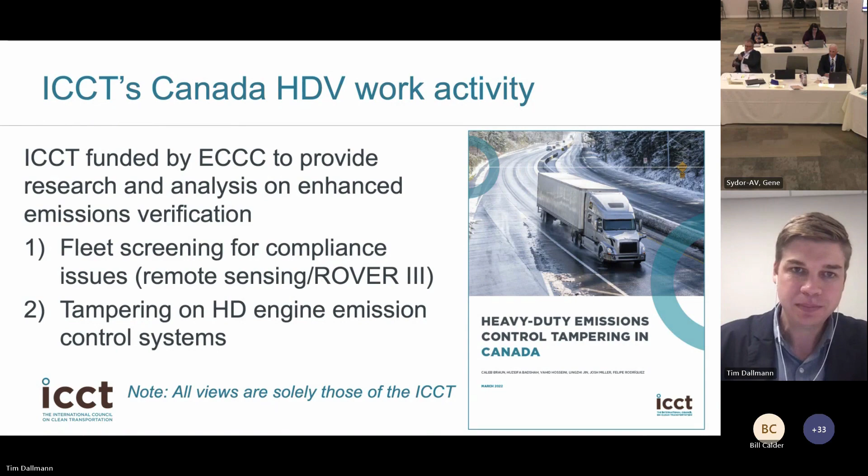So just to start off with some high-level objectives of what we're trying to do with this analysis, we really wanted to provide a holistic assessment of the issues that motivate and facilitate tampering with emission control systems of heavy-duty vehicles in Canada. And we set out to do that in a few different ways. So that included reviewing the current regulatory landscape for both provincial and federal tampering legislation.

We wanted to investigate what the technology vulnerabilities of modern heavy-duty vehicles were to tampering, and really learn more about what avenues were available for owners of vehicles who were pursuing tampering to limit the effectiveness of emission control systems. In line with that objective, we also wanted to look at those actors who are providing the devices that are used to tamper with vehicles, as well as the services to install those devices, through a market assessment, and then also learn the perspective of fleet operators.

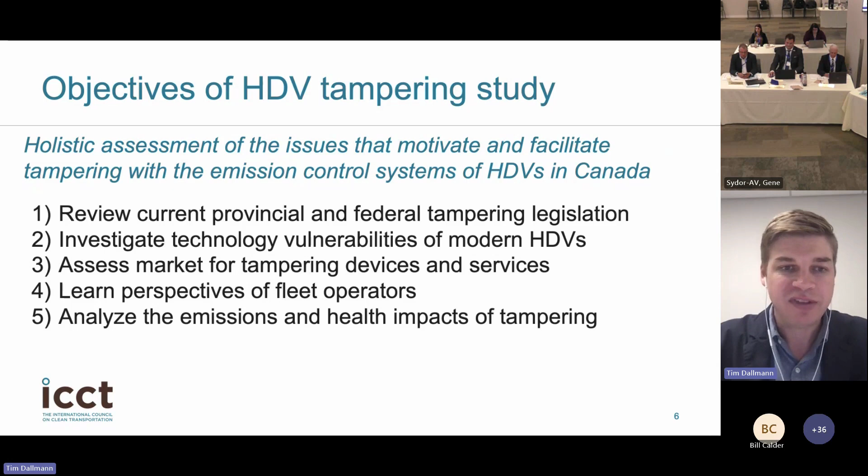So we reached out directly to fleet operators to learn more about their perspectives on tampering and the potential motivations and avenues that different stakeholders could take to try to prevent tampering. And finally, the bulk of the work that we did was to conduct a modeling study to analyze the emissions and health impacts of heavy-duty vehicle tampering, to really try to assess what the impacts would be on both air quality as well as residents' health based on the tampering study that we've been doing.

So I'm going to lead with some key findings. We'll come back to these later, but I wanted to provide them here just to frame some of the slides I'll be presenting after this. We found that anti-tampering legislation in Canada is insufficient. There are a lot of opportunities for folks to pursue tampering without fear of repercussions. Secondly, we found that tampering devices are readily available by well-established providers. So again, for those deciding to tamper with their vehicles, we found that there were a lot of avenues available for them to do that.

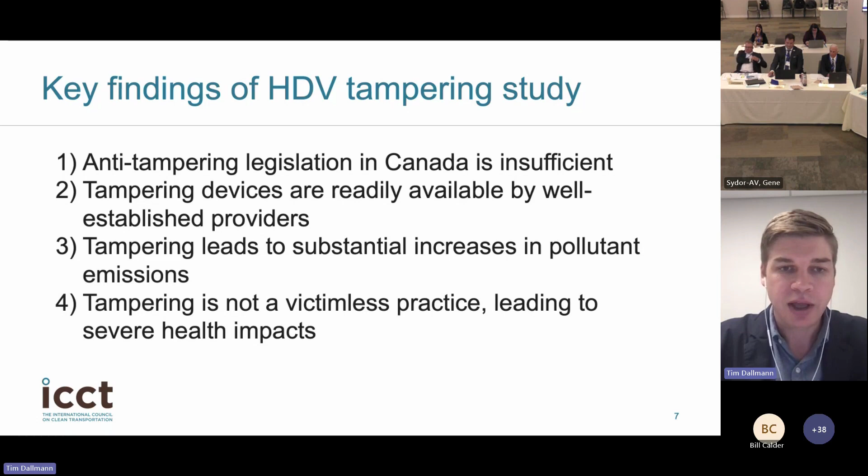Thirdly, tampering leads to a substantial increase in pollutant emissions. So the results from our modeling study really reinforced that there are significant impacts, and increased prevalence of tampering can lead to very substantial increases in harmful pollutant emissions. And finally, those emissions lead to severe health impacts. So tampering is not a victimless practice. There are real-world outcomes and negative impacts on people's health.

So just to get started, I wanted to start out with an overview of the architecture of modern diesel engine emission control technologies, how these technologies work to greatly limit pollutant emissions, and how, if they're not working effectively, the emissions can increase greatly. On the right side, the plot shows the progression of federal emission standards in the United States, which are followed by Canada, for heavy-duty vehicle engines over time. The x-axis shows the emission limit for nitrogen oxide pollution, or NOx pollution, and the y-axis shows the emission limit for particulate matter emissions.

So we can see going from 1988 in the top right corner to the small box near the origin of the axis, where it's labeled 2010, there's been a great reduction in the emission limits that manufacturers of heavy-duty engines are forced to meet. So there's been over a 90% reduction in both the PM as well as the NOx limit. And the reason why regulators have been able to move forward with these more stringent standards is that there have been great increases in the capabilities of after-treatment control technologies over time that have enabled these more stringent standards.

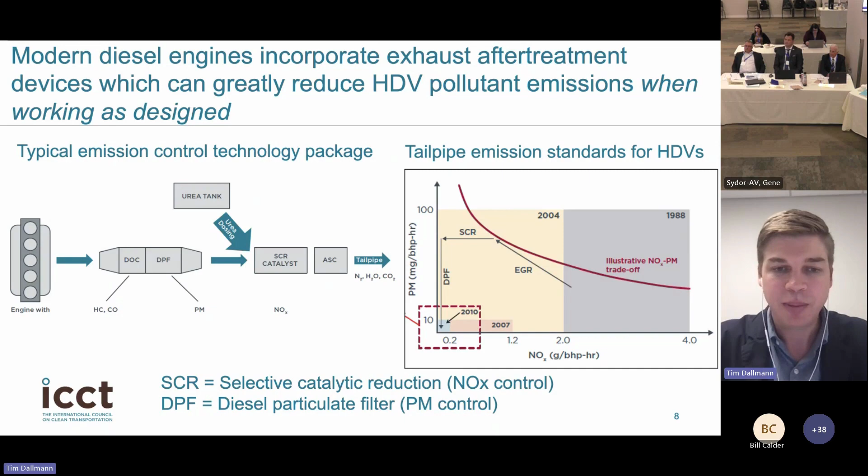So that leads us into what some of the motivations for tampering are. So if there was no benefit to vehicle owners and operators, there would be very low incidence of tampering. But there are a few areas where there's either demonstrable benefits or perceived benefits that lead to a higher motivation for tampering with these emission control systems. The first is operational cost savings.

In particular, the selective catalytic reduction system uses a working fluid called urea. So that's something that owners of vehicles and operators need to purchase and keep their tanks full. So that can lead to an annual cost savings of between $1,500 and $3,000 if that was removed from the operating cost for a vehicle.

Secondly, there's perception that removing or tampering with these emission control equipment can lead to decreased maintenance and downtime. So there are some regular maintenance intervals for the control equipment, including the particulate filters that are used to control PM pollution, as well as regular maintenance of the selective catalytic reduction system.

And finally, there's a perception that the use of these control systems leads to increased fuel consumption and, of course, higher fuel costs if that's the case. There are minor fuel economy penalties to some of the technologies that are used, including exhaust gas recirculation, which is used to control NOx pollution, as well as the particulate filter system.

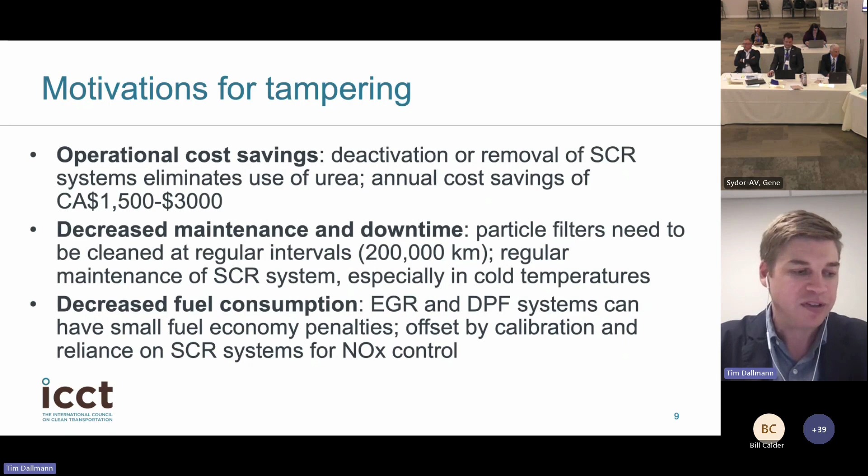However, most of these penalties have been offset by the modern ability for engine manufacturers to calibrate their engines to be very efficient and utilize SCR systems for NOx control. So in our opinion at the ICCT, the fuel consumption motivation is not in reality going to do much given the efficiency savings offered by modern diesel engines.

So I talked a lot about tampering in general. This slide gets into some of the more specific ways in which we found that modern diesel emission control systems can be tampered with that will affect their efficiency and ability to reduce pollutant emissions.

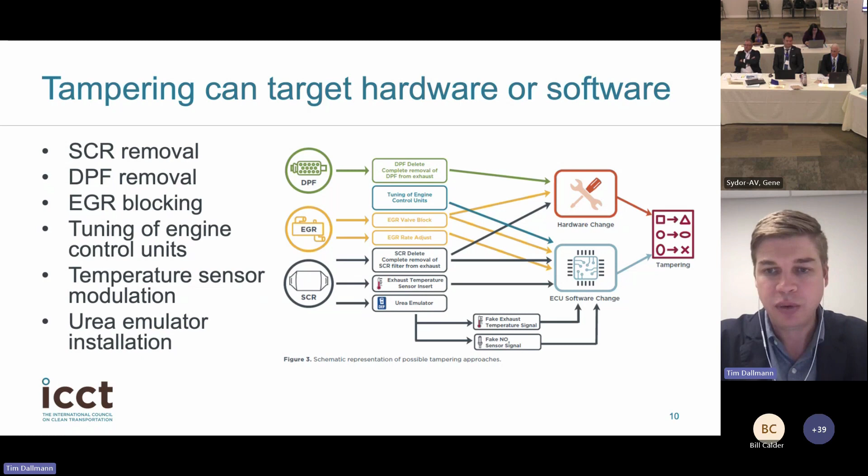So that includes anything from direct removal of the emission control equipment, so completely removing the SCR system or the DPF, all the way down to manipulation of the software that controls how these systems operate. So there's a wide variety of different avenues by which folks can tamper and affect the ability of these control systems to do their job in controlling pollution.

So that gets us into some of the aspects of the study that we did in order to provide an overview of the legislative background that's affecting heavy-duty vehicle tampering in Canada. So as part of the study, the authors reviewed the current regulations and provisions for prohibiting tampering that exist at the federal level as well as the provincial and territorial level across Canada.

And what is summarized in the report is that largely the provisions prohibiting tampering and enabling its detection are decentralized and within the jurisdiction of provinces and territories. And out of the provinces and territories that we reviewed, 5 territories and provinces, including Alberta, do not explicitly prohibit tampering of emission control systems. So there's no explicit regulatory language prohibiting owners from tampering with those emission control systems on their heavy-duty vehicles.

And we found only 3 provinces, British Columbia, Ontario, and Quebec, that have both prohibitions on the books for preventing tampering, but also have mechanisms in place by which they can enforce those provisions. So in our analysis, it's not enough to have language and regulations that prohibit tampering. There also has to be mechanisms in place for the authorities to detect when that tampering is happening and take action against those who have tampered with their emission control systems.

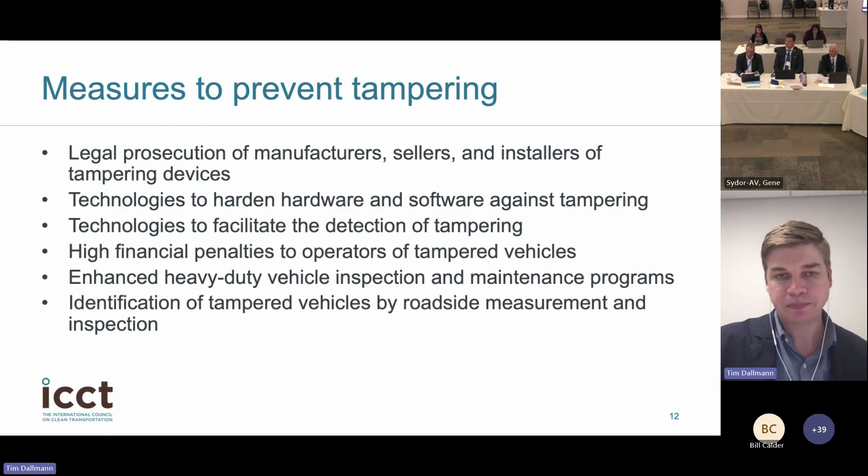So with that background, I want to transition now into the modeling work that the ICCT did in order to try to quantify the impacts of heavy-duty vehicle tampering. This slide shows the approach that we took. I'll walk quickly through each of the pieces here. So the ICCT maintains 2 models that we use and regularly update in order to model vehicle emissions inventories and the impacts of different policies on emissions, which we call the roadmap model.

And then the second piece in blue on the right, which we call the FATE model, is another component of our modeling infrastructure that's used to take the results from the roadmap model when it comes to the changes in emissions from a specific policy or scenario and translate those into changes in ambient air quality concentrations and health impacts.

So together, the roadmap and FATE models are able to look at different emission scenarios where, for example, if Canada were to implement new emission standards for heavy-duty vehicles, we could look at how that would impact total emissions over time, and consequently how that would impact air quality and ultimately human health.

So each of the other pieces in beige show some of the input data that we fed into the model. On the left, we have emission factors for various vehicle technologies, ages, and emission control levels, as well as the impact of tampering on those emission factors. We have assumptions about the incidence of tampering, so how frequent and what percentage of the fleet is assumed to be tampered with, as well as fleet inventories and fleet activity data at the provincial level.

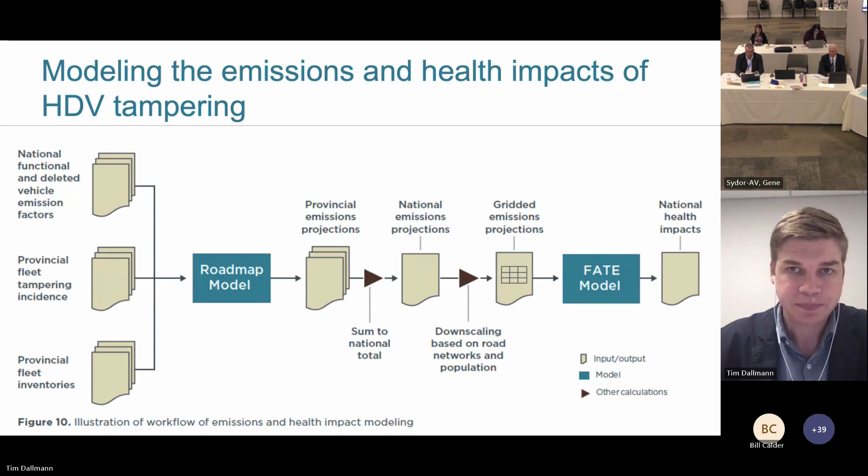So one of the key inputs to this study really is the tampering incidence. So how frequently and what percentage of the fleet can we consider to be tampered with? And this is a really hard data point to come by. There's not a lot of information out there, and that's one of the reasons why, in our opinion, the Rover 3 study has been a really valuable resource: it's actually providing some real data that can be used to inform these types of studies.

Unfortunately, the data from the Rover 3 study wasn't available to the ICCT when we did this analysis, so we had to come up with a different approach to define the prevalence of tampering in Canada and in individual provinces. And since there was really a lack of data at the time we were doing this work, we looked at a couple different scenarios to provide a range of what the impacts might be under different levels of tampering.

So this slide shows the 4 different scenarios that we modeled in our work. We started with the counterfactual, which was a case where we assumed that there was no tampering. In that case, we assumed that all of the trucks on the road were meeting emission standards and that the emission control equipment was operating as expected and as intended. So you can see that the incidence of tampering in Alberta and nationwide is assumed to be 0%.

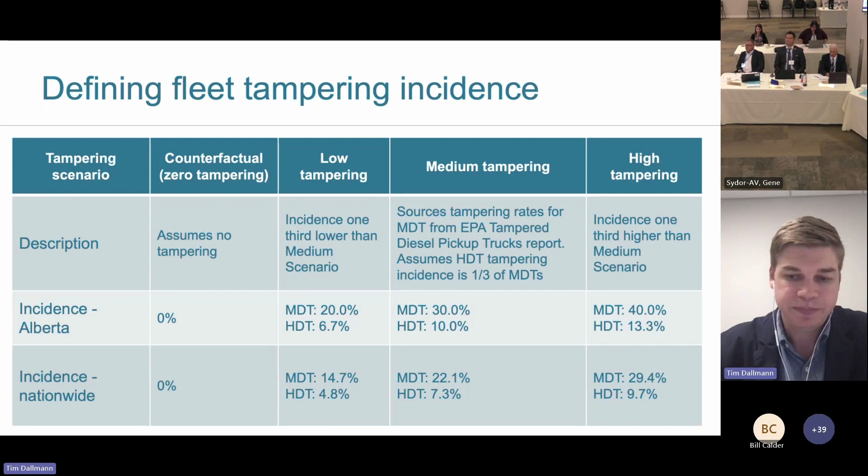So this slide is quite detailed, so I'll just try to point out a few of the key features rather than explain the whole thing. Essentially, this shows our estimates of excess emissions from tampering in 2 years, 2010 and 2019. We're showing results for NOx in the left-hand plot and PM in the right-hand plot, for each year at the provincial level.

So one feature I really want to point out is that in all cases, emissions decreased from 2010 to 2019. And that's really showcasing the effectiveness of the modern diesel control system. New vehicles sold into the market in 2010 were required to have both diesel particulate filters and SCR systems, and the combination is really effective at reducing emissions. So you can see, absent any tampering, the implementation of those new technology packages really reduces emissions of both NOx and PM.

But the other thing to point out is in blue. If we just focus on the far left-hand plot, the blue is showing the excess emissions from tampering for each province in 2019. As the entire fleet's emissions are reduced through these advanced control technologies, the importance of tampering becomes much greater, because you have 90% of the fleet that's very clean, but those tampered vehicles have much higher emissions and are driving a much larger portion of the inventory.

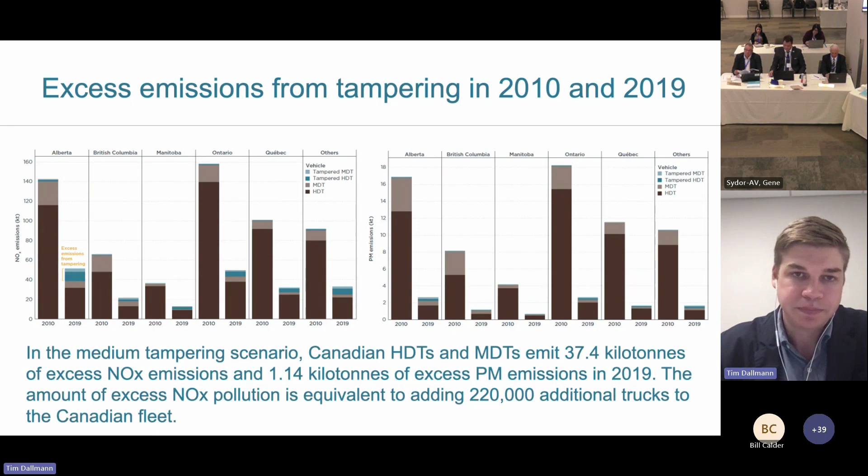So in addition to looking at past years, we also looked forward at what the impacts of tampering might be as we continue to overhaul the fleet and introduce more stringent emission standards over time. This shows projected emissions between 2020 and 2040 for NOx on the left and PM on the right for the province of Alberta for each of the different scenarios. The brown line shows the counterfactual scenario.

So again, in the case where the assumption is that there is zero tampering going on, we can see that the implementation of both the existing standards and improved standards over time greatly reduces both NOx and PM emissions to near zero levels. However, in the tampering scenarios, even the low tampering scenarios offset much of that potential emissions reduction.

So we found that in the low tampering scenarios, PM pollution could be about twice as high as the counterfactual example, and the discrepancies were even larger for NOx emissions on the left, where we saw emissions could be up to 6 to 7 times higher under the various tampering scenarios.

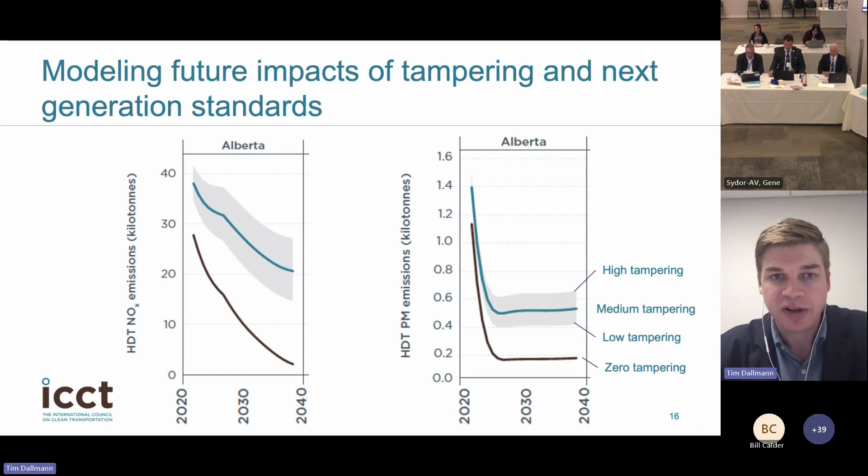And those excess emissions have impacts, not just on air quality, but also on health. So this plot shows our estimates of the differences in premature deaths in the top plot and disability-adjusted life years in the bottom plot for the different scenarios that we included in our modeling exercise.

So we can see on the top, just focusing in on the estimated premature deaths from emissions from heavy-duty vehicles in Canada, the implementation of existing and new emission standards greatly reduces the health burden of heavy-duty vehicle activity in Canada under the assumption that there's no tampering going on.

So if we look at that brown line, we see the number coming down from about 423 in 2020 to around 65 in 2040. However, again, if there's tampering happening, even in a low incidence scenario, those health impacts increase greatly. So from 65 to up to around 474 in 2040 for the medium tampering scenario.

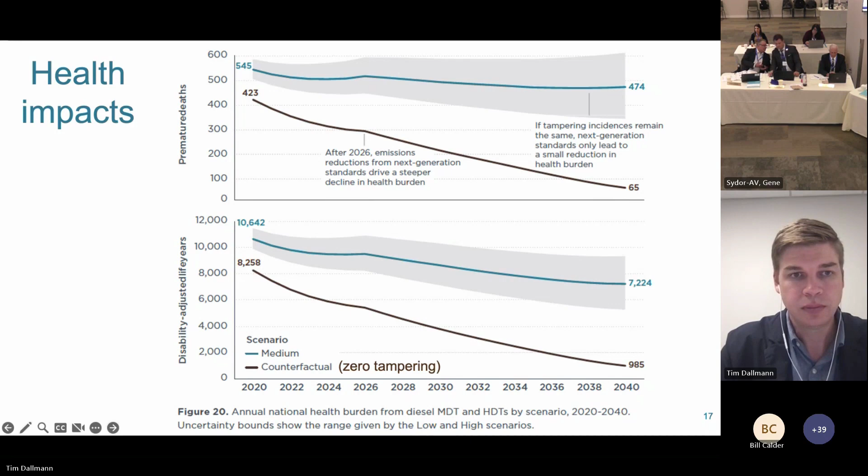And this also speaks to the need for studies like Rover 3 that are actually trying to quantify what this incidence is and to provide some real world information that can help to support better estimates of both the emissions impacts of tampering as well as the health impacts.

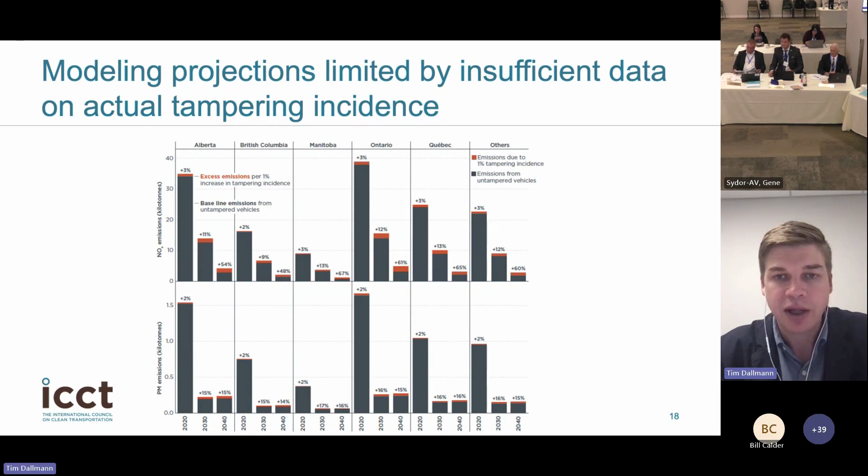So in closing, I just want to reiterate some of the key findings from the study that I presented here today. First, from our viewpoint at the ICCT, we consider anti-tampering legislation in Canada to be insufficient. Alberta, as well as many other provinces and territories, either lack statutes prohibiting tampering or have not yet adopted provisions such as inspection and maintenance programs that enable enforcement of those prohibitions.

Secondly, we found in the course of the study that tampering devices are readily available from well-established providers. In particular in North America, popular approaches include a combination of hardware removal, so actually removing pieces of the emission control system itself, or manipulation of the software that is controlling the actual operation of that control equipment.

Thirdly, from our modeling study, we were able to demonstrate that tampering leads to a substantial increase in pollutant emissions. So again, in 2040, each 1% increase in tampering is modeled in the study to result in an emissions increase of PM of 15% and NOx of 57%.

And finally, tampering is not a victimless practice. The study was able to quantify the health impacts of different tampering scenarios through 2040. And we estimated that each increase in tampering incidence of 1% leads to 690 excess premature deaths over the next 20 years.

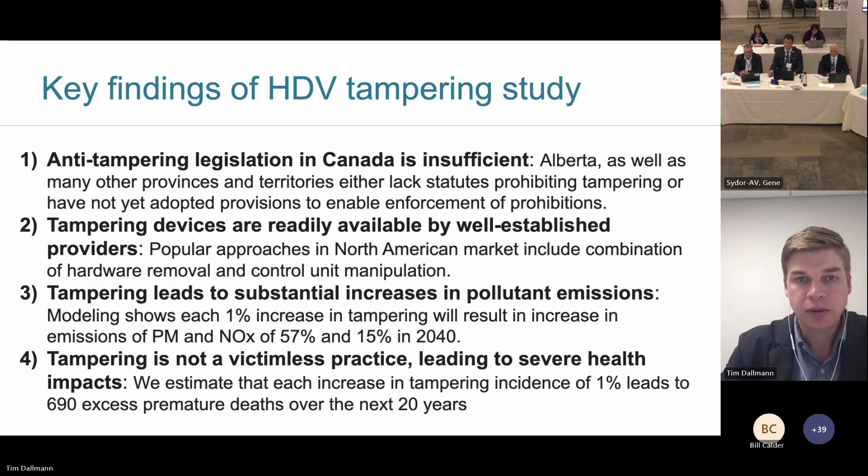In closing, I'll share here the policy recommendations that were put forth in the ICCT study, and I'll reiterate again, these are the perspective and viewpoint of the ICCT as an international independent expert organization. So the first is we recommend that Canada should explicitly prohibit tampering at the federal level. The approach now, leaving decisions to each province and territory, we found to lead to a patchwork approach that hasn't been effective in discouraging tampering.

Secondly, steep penalties should be set for the providers and users of tampering devices and services to, again, discourage that as a route to manipulating the engine and control equipment. We found that inspection and maintenance programs can be an effective way to address tampering. So requiring regular testing and inspection of vehicles, again, provides another barrier to folks who might be pursuing tampering options.

As I mentioned earlier, remote sensing and other roadside emission inspection methods can be used as a way to identify when tampering is happening outside of the normal inspection and maintenance program requirements. And the last two points here speak to future emission standards being used as a mechanism to drive the adoption of technologies that can prohibit or make it more difficult to tamper with engines and emission control equipment.

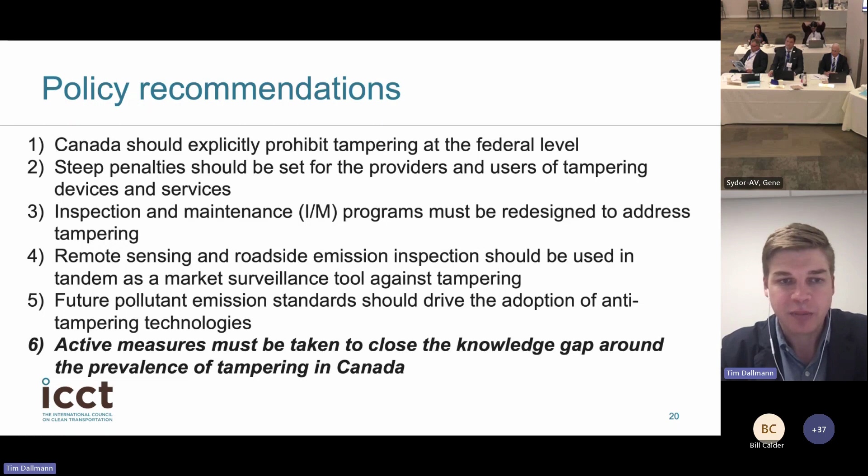And finally, I put this in bold because I think it speaks to the presentation that Niranjan will be giving. We really think that there should be more research and study of the prevalence of tampering in order to close a knowledge gap and provide the information that can support the implementation of these various policy recommendations.

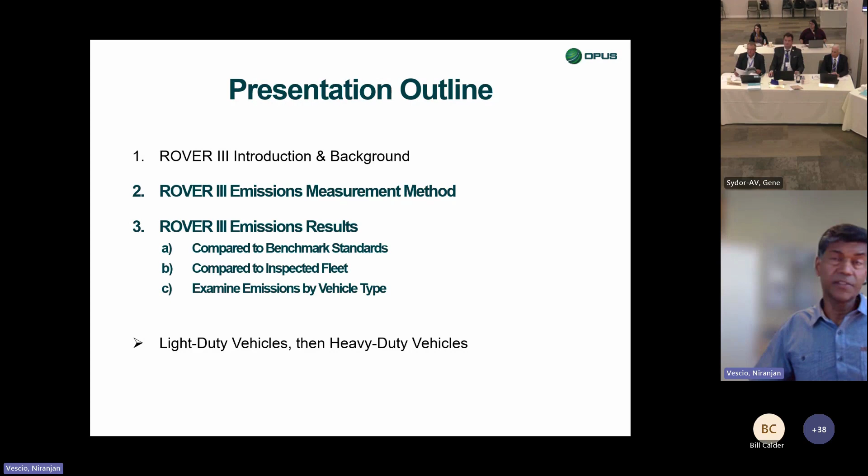Okay, I'll do light-duty vehicles first and then heavy-duty. And if necessary, I'll pause after light-duty and we can take some questions or we can just move right ahead. All right, so here's the background, and you know it just as well as I do. CASA had a non-point source report, we call it mobile sources, that was done a few years back.

Within that report were projections or estimates from an air pollutants emissions inventory, and that indicated that heavy-duty diesel vehicles and then light-duty gasoline trucks were a large source of nitrogen oxides. Those gasoline trucks were also a source of hydrocarbons, and those heavy-duty diesel vehicles were a particular source of particulate matter. Okay, and so that was the motivation for CASA contracting with us, and we did the light-duty vehicles and heavy-duty vehicles in different years.

85% of the data we collected for light-duty was in 2021. There was a little bit collected in 2020 when we came up to scope things out. And then we went back and collected about 10% of the data in Fort McMurray for the light-duty vehicles in 2022. All of it was in 2022 for heavy duties. Okay, there were previous rovers, but they were with older technology and they only focused on light duty.

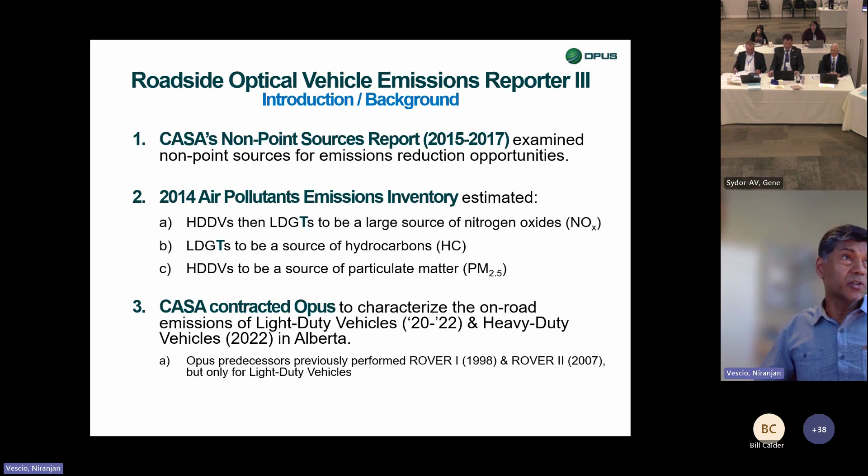All right, light-duty vehicles. I think this is familiar to you. This is what remote sensing looks like. It's going to be a very brief method overview. We did it in Calgary. The devices are in those boxes. They're at the level at which most tailpipes, light-duty tailpipes, emit.

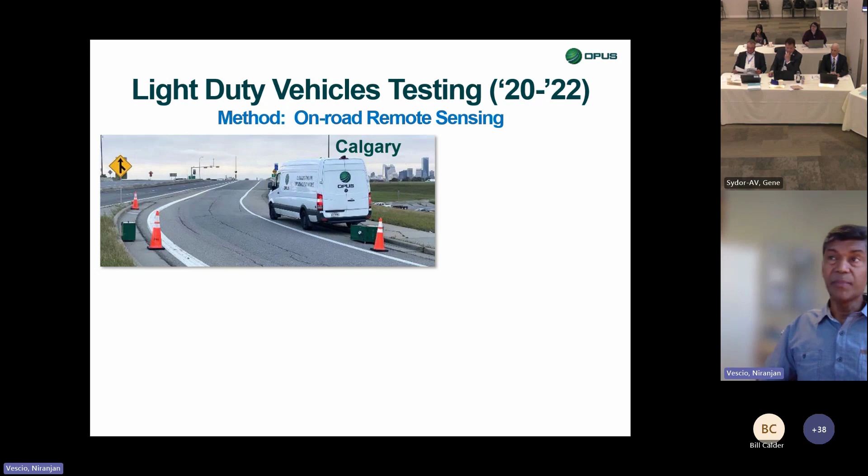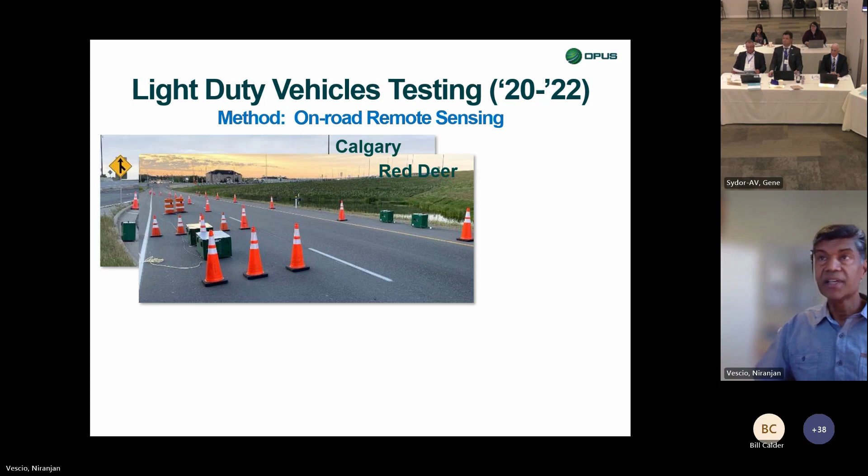We did it in Red Deer, sometimes with 2 devices at the same place, sometimes 2 because these are unattended at different places. We did it in Edmonton, Grande Prairie, and then Fort McMurray. A nice robust data collection, almost 50,000 good measurements that we could use in analysis.

Much like the United States, it's mostly a gasoline fleet. It's about the same percentage here, maybe even 96. All of these were Alberta vehicles, largely. You don't have a lot of invasive species, so to speak. And the bulk of these are light-duty trucks. That was a little higher than what we find around here. More light-duty trucks for you guys than down here.

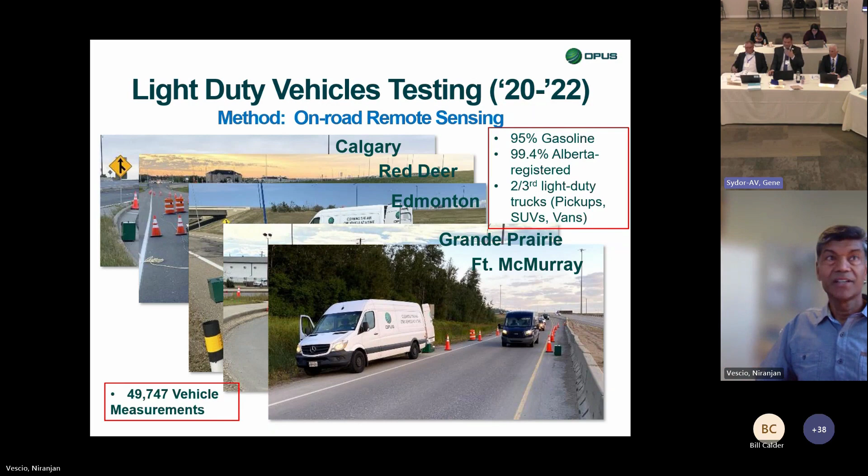Okay, comparing to benchmark emissions. I call them benchmark emissions because they're not the exact standards. We had to make some assumptions to get everything into common units. And it leans towards the newer standards over this broad range. The range I'm talking about is the 2003 and newer models. That's what we focus this particular analysis on, because they represent the bulk of the vehicle kilometers traveled.

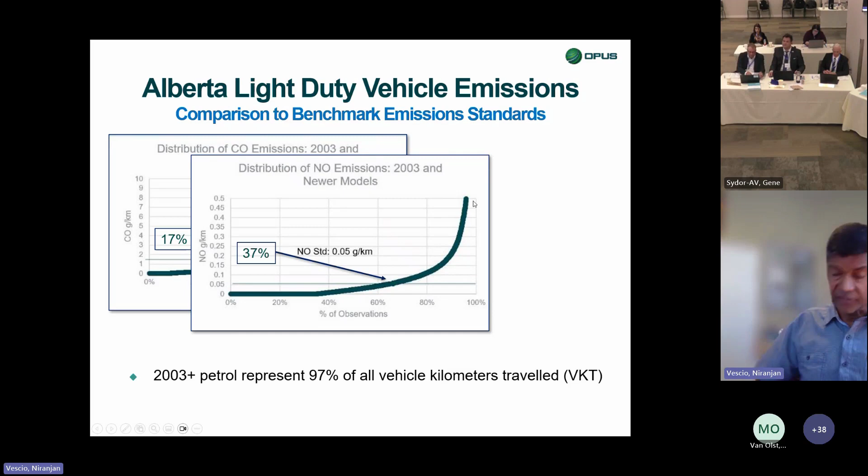For NO, 37% of our observations in this particular case were above the standard. Again, I don't get extremely concerned until I see 8, 10 times. There's a very small fraction that would be 10 times above the standard. Hydrocarbon, slightly different story. Right off the bat, you got the majority of your observations above the standard. But here's where things start getting of concern, because as much as 10% of the observations were 10 times the standard. And that's when we start questioning whether there's been significant malfunctions or maybe even some tampering going on.

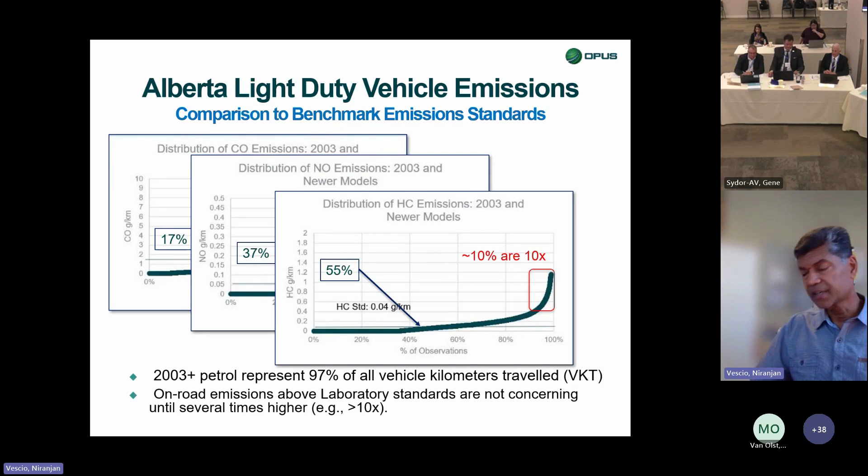Is 10 times a magic factor? No, I'm going to give you some perspective. This is a slide from my 2017 presentation after everything went down with Volkswagen. We weren't looking for Volkswagen emissions. We were doing our thing in the United States. We went back and looked retrospectively at what they looked like in our data. Each colored line is a model year of the Euro 5 2-liter diesel. Very few of them, but they were in our data set, as measured in each of the measurement years. The only takeaway is, on average, they were about 10 times their applicable standard.

It wasn't until those culprit lean NOx traps, which were insufficient, were being replaced with selective catalytic reduction systems that the emissions started coming down. They started doing that in 2014, and they had done most all of them by 2015.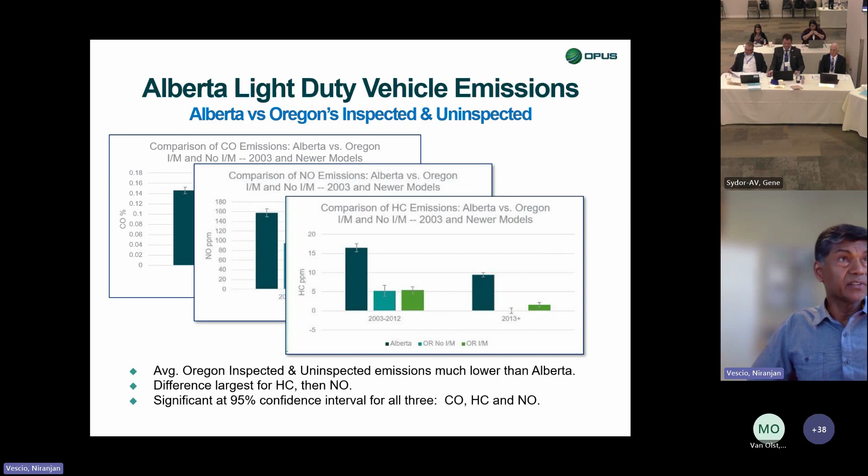Alberta also exhibited a much higher rate of high emitters. In this particular case, we're judging high emitters by these standards if they're an exceedance of the...

Well, by the way, are you able to see my cursor when I move it around? Okay, okay. I just want to make sure I'm not just fooling myself.

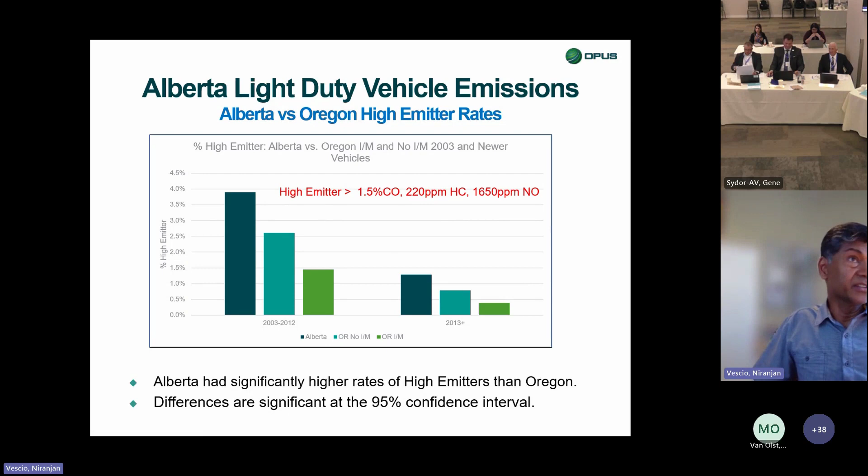High emitter in this particular case is above those levels. So a much higher rate in Alberta, and the differences were statistically significant at the 95% confidence interval. Okay, I'm drilling down into contribution, and then I'm going to get into a particular type that was of concern, vehicle type.

Here's where you got validation of the vehicle kilometers traveled. These are 4 groups, okay? In this particular case, I have the oldest, 1997 and older. I have a group of 5 years, 1998 to 2002. A 10-year group in the green, and then the newest 10 years, about 2013 and onward. And that's from the perspective of when we did this work.

Okay, so these 2 groups, the 20 years and newer vehicles, represent the bulk of vehicle kilometers traveled. They're the ones traveling. And they represent a proportionally smaller fraction of the overall emissions. That's to be expected. They're the newest vehicles. They may travel more than their contribution to the overall inventory.

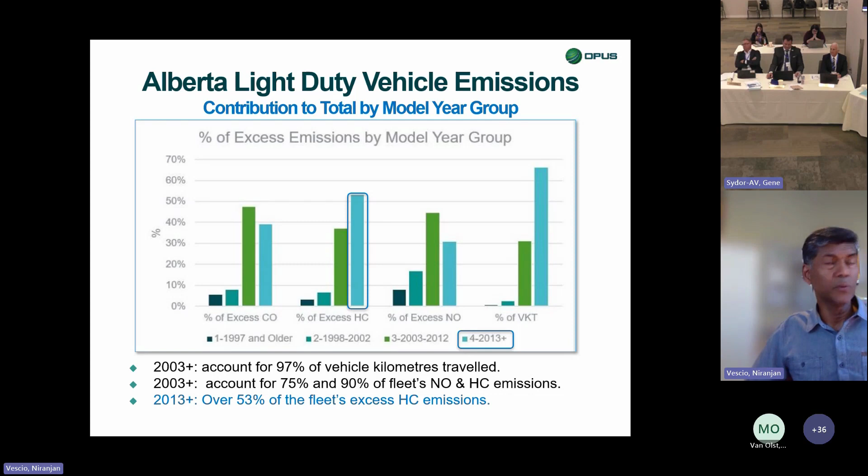But it was a little surprising from our point of view here in the US to find the latest 10 model years contributing over 50% of the fleet's hydrocarbon emissions. That's a little higher than we would normally see. But if you're looking for who contributes disproportionately, it's the second 10 years, 2003 to 2012. They're only 30% of the vehicle kilometers traveled, but they're contributing proportionally more of the NO and hydrocarbon emissions.

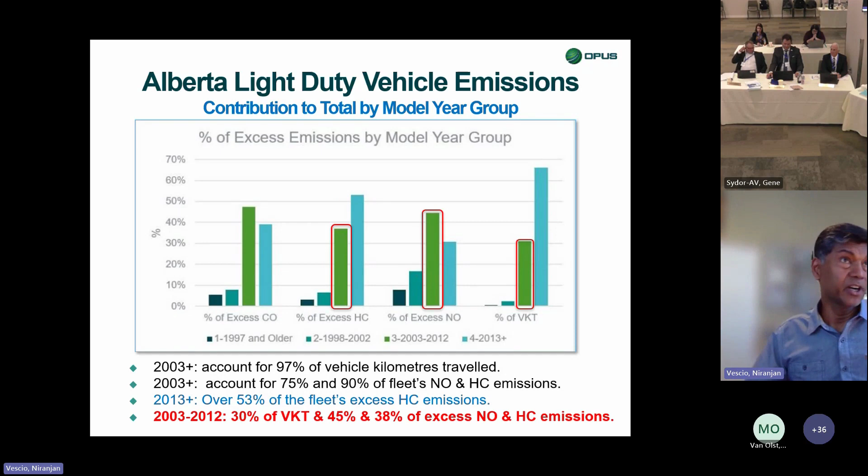Okay, so to sum up light-duty gasoline vehicles, in the case of hydrocarbons, you saw that 55%, the majority, were higher than the Canadian benchmark standards. But of particular concern is that as much as 10% were well above the standard, in this case, 10 times. Areas where we start suspecting malfunction or even perhaps some other intervention.

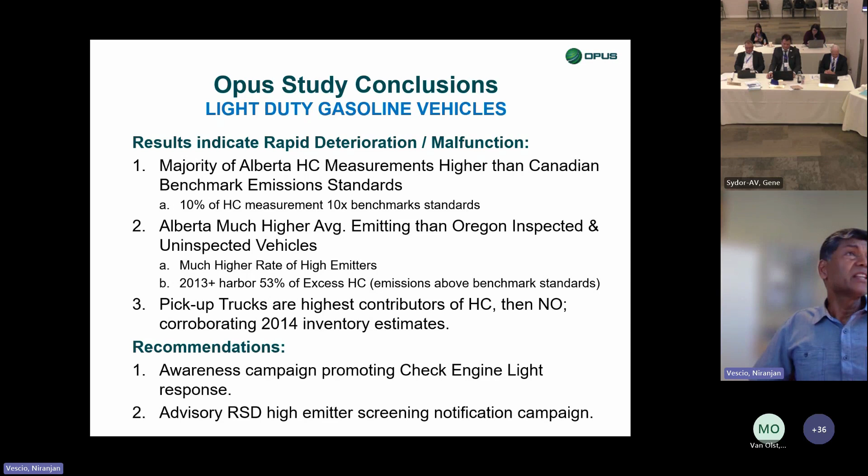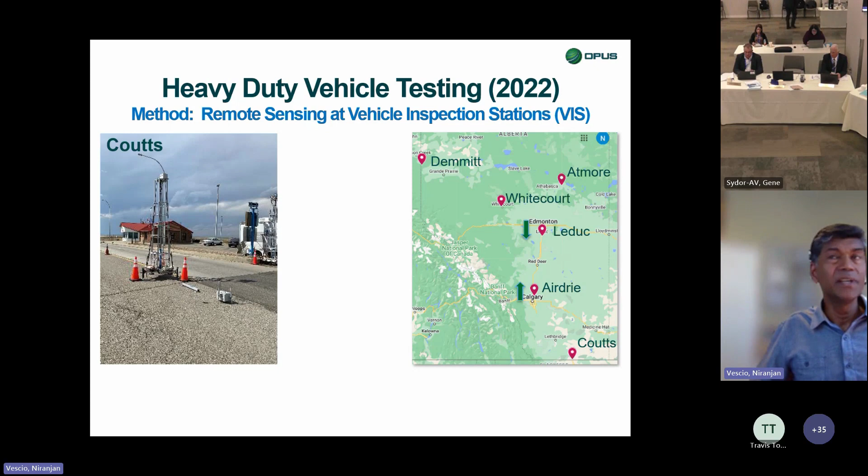On to the heavy stuff, the fun stuff. Okay, the method was a little bit different. You saw those remote sensors nicely packaged in green boxes. They have batteries. We can leave them unattended. We've got to place a sensor low and a sensor high. Here's a better example, the picture of Airdrie. So the point here is we did 6 vehicle inspection stations.

And I should also say, we did a reboot partway through planning our program. We were looking to do heavy-duty vehicles along with light-duty vehicles at typical on-road sites. And I'm glad we reset because we got a lot more data focusing on heavy-duty vehicles at these vehicle inspection stations. We got a lot more data.

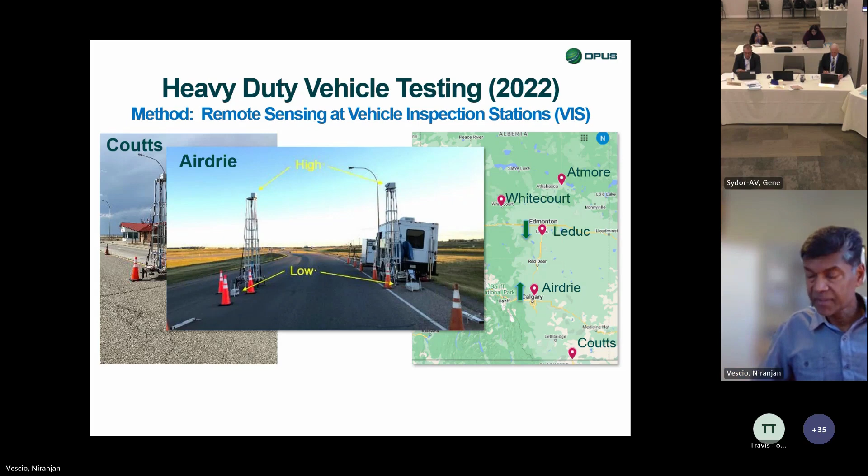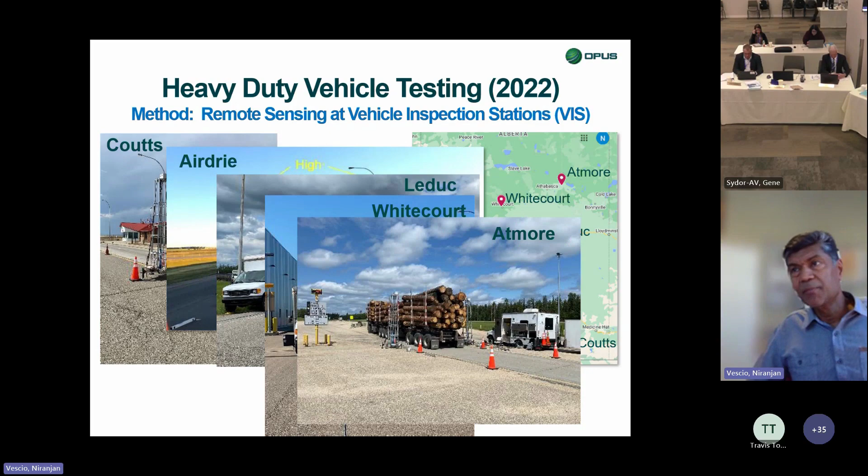So yeah, Coutts, Airdrie, one high, one low for the downdraft, for the updraft, Leduc, Whitecourt, Atmore. Places like Atmore were quite interesting, as well as Demmitt, where we had a very enthusiastic sheriff who was keenly interested in our data. That's because there were some vehicles that I never knew existed passing by. So very interesting oil and gas vehicles, and it was quite illuminating.

As I said, we collected much less than light duty, but surprisingly a good number, over 6,000 measurements of heavy-duty vehicles. And believe me, the equivalent effort at light-duty sites might have gotten one every 5 minutes, or it would have been much less. So I'm glad we focused at vehicle inspection stations. 97% diesel, not a surprise. 83% Alberta registered. Not that much of a surprise, and most of them are tractor trailers.

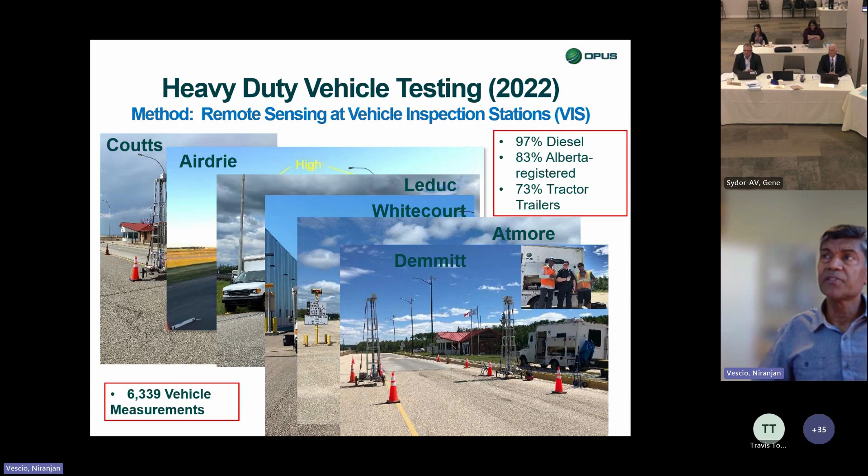Okay, I have this slide because unlike the light-duty vehicles, which were all Alberta, you got a significant population. 17% of the observations here were of heavy-duty vehicles from other places, so a fair amount of other provinces contributing. And in some vehicle inspection stations like Airdrie near Calgary, a fairly sizable population of dump trucks. We specifically went through every image to make sure we were classifying it appropriately, but that's a dump truck, that's a tractor trailer.

And then we do see at these vehicle inspection stations, these delivery trucks come by and even a pickup truck, but just to assure you, we weren't including those in the analysis of heavy-duty vehicles. But I guess they come by to check their weight.

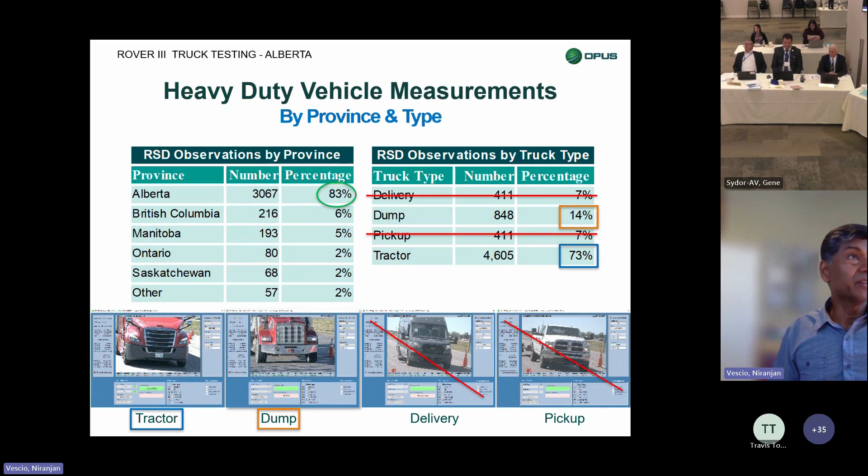Okay, comparing them to benchmark standards. Not surprising, they're not in exceedance of the CO standards, but diesels don't put out CO. In fact, they really don't put out hydrocarbons either. And by the way, we're focusing on 2010 because that's largely 83% of the observations, and that's akin to vehicle kilometers traveled too. 2010s are responsible for the bulk of the kilometers traveled.

Here's hydrocarbons, a little bit of a surprise, but again, I don't get nervous until I see exceedances by multiple times the standard. 45 is larger than I would have expected, especially at the low power range that we were measuring. But here's where things get a little more interesting.

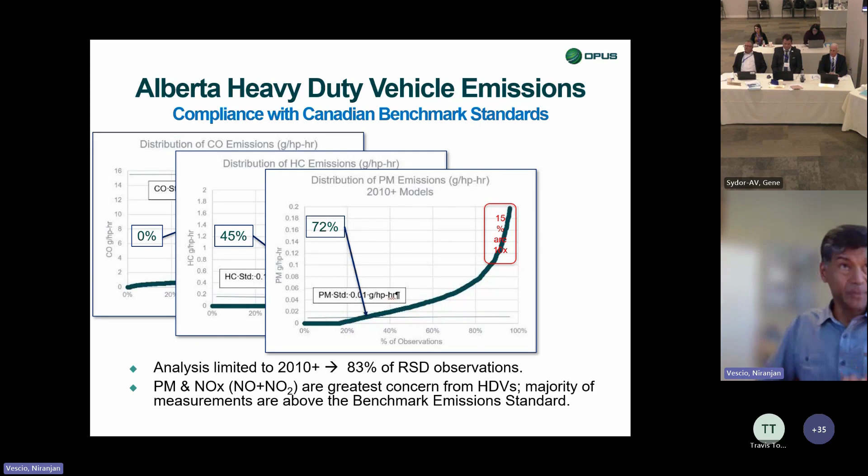Okay, particulate matter. Now, I'll be quick to point out that we are not sucking exhaust onto a filter and weighing it. This is not a weight of black carbon. Ours is an optical technique, naturally, because we're measuring vehicles as they go by. So in technical terms, it's fuel specific, but it's an estimate. We're using extinction coefficients, how much black carbon extincts light, to estimate how much black carbon there is. So it's not a direct PM measurement. But when things are above 10 times, it's starting to indicate something unusual is happening with the vehicle.

It's NOx that was a surprise, because 30% of our observations were well above the standard, in this case, 10 times. Now, I'm not suggesting by this that 30% of the vehicles right off are tampered. We did not stop any vehicles. We're not inspecting any vehicles. These are the results of the measurements.

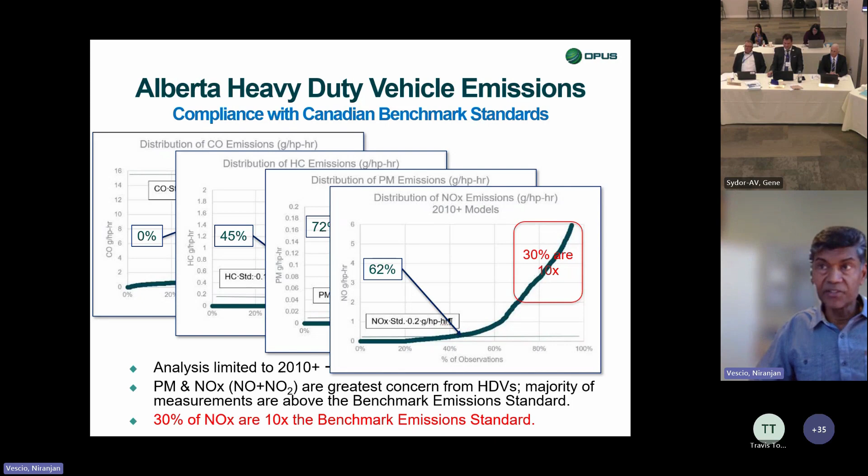To have 30% of the measurements be above the standard at that level is a concern. And so it's leading us to suspect something is happening: malfunction, unusual deterioration, or perhaps intervention to tamper. So we want to look deeper into this 30%.

We said, okay, there's a bunch of vehicles that came by at Airdrie and at Leduc, which were the highest volume VISs. Many were measured multiple times, which gives us more confidence. In this case, the 17 most frequent vehicles with the most measurements, we looked at those, and right off the bat, when a vehicle's working well, as 60% of them were, the NOx emissions are well controlled. They're low. But at least 30% are much more variable and sometimes very high.

So it was another indication that perhaps our 30% number wasn't completely off the mark, because we saw 30% of the vehicles that were being measured multiple times, 4+ times, with averages at very high levels.

Okay. Here's an example. It happens to be a dump truck, and I hope I'm not exposing anything with the number, but this one came by at 1,500 ppm. It came by again a couple hours later, 1,900 ppm. I'm talking about NOx here. An hour later, 1,700, 1,000. Those are very high levels. Okay, even here.

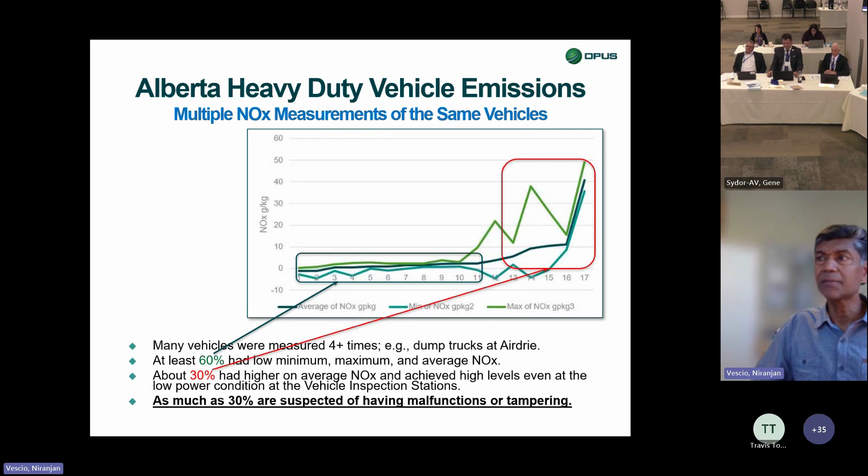So that's why we're starting to look at this 30%, say up to 30% could be malfunctioning badly or maybe have had intervention of some kind. All right.

Comparing it to California. Why? Because California is the longest inspected fleet, the oldest inspected fleet. They've had an inspection program there since the 90s. Again, we're looking at just 2010 and newer vehicles, and we've broken it up into two 5-year bands. So all these vehicles, 2010 and newer, should have those devices that Tim was talking about. The DOC, the SCR, selective catalytic reduction systems, DPFs, and they should be abiding by the newest standards.

And I want to assure you that these were done at different times. California was in 2020, but towards the winter in November 2020, and Alberta was in 2022. So roughly speaking, similar temperatures, and definitely with the same technology. First thing here is Alberta looks considerably higher than the average California vehicle. In some cases, considerably higher.

I mean, let's focus on NOx alone. You know, on average, we found that the Alberta fleet of the first half, the 2010 to 2015, again, they were averaging over 10 times the standard. Okay, you can clearly see that California is above the standard as well, but not nearly as high.

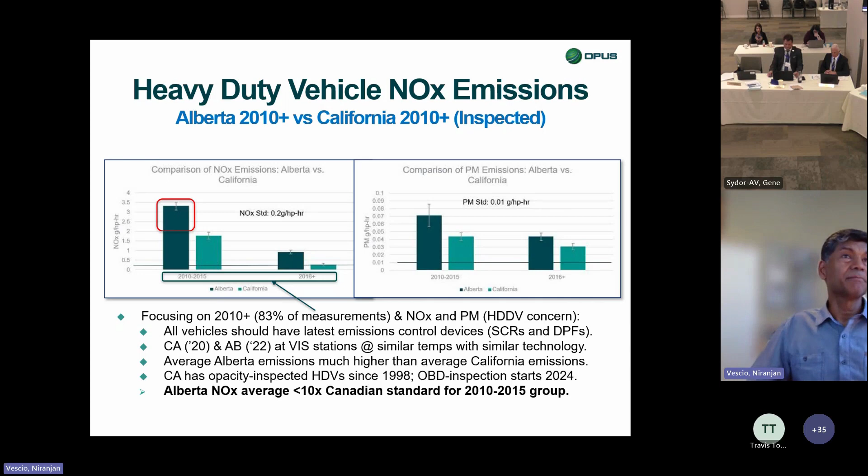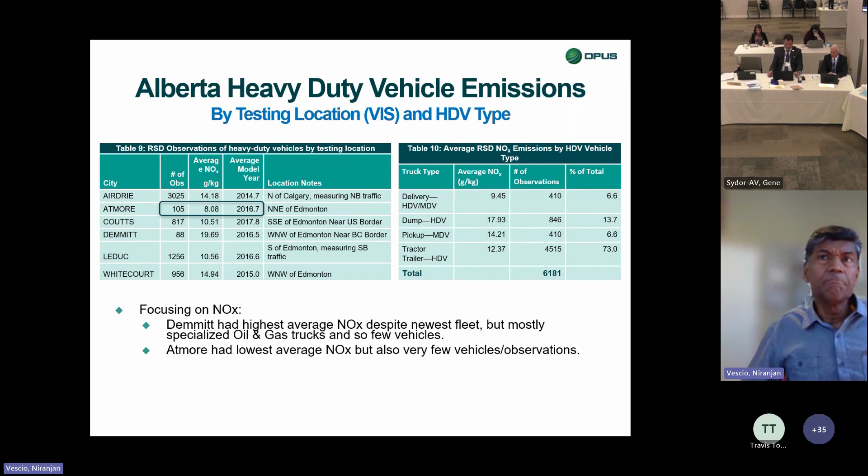Atmore, in this particular case, was the lowest. It also had very few observations, very few vehicles, so probably not a huge concern from an air quality standpoint. Coutts, where it was predominantly long-haul tractor trailers, was also fairly low, second lowest, but it really was the newest fleet, and so I'm not surprised at its level.

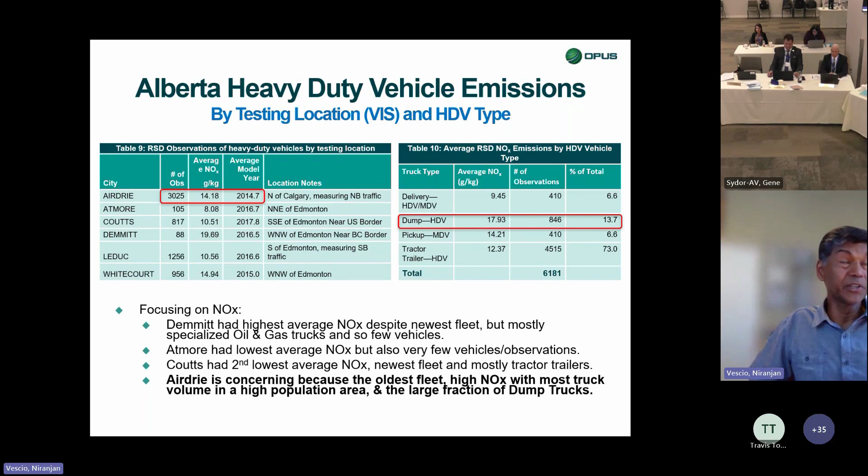Airdrie is where the concern is. It's closest to the highest population area, I believe, of Alberta, near Calgary. And it's concerning because it's got the oldest fleet, it's got very high NOx emitters, and it's got the largest population of dump trucks that we observed, which is, as you can see, a much higher NOx fraction of the fleet. So you've got probably the worst type of vehicle, the highest emitter in a high population area, and there's lots of them making many, many laps, as I showed you earlier with the cascading picture of that one dump truck. Okay.

So to sum up heavy duty, I'm surprised to see this many of the observations well above the standard, 30% above, more than 10 times the standard, a little less for PM. And that's where we really suspect malfunctions or tampering. The 10 newest model years, 2010 and onward, maybe 12, a significant portion of them, this represents the most vehicle kilometers traveled, and they were significantly higher than California's. The second half, the 2010 to 2015, they average 10 times the standard, so that's of concern.

But this is all corroborating what your inventory estimated, which is heavy-duty vehicles are a significant source of NOx. But I will tell you that these dump trucks, I saw the highest. Clearly, the data corroborates it, and it's of concern when they're traveling up and down the central corridor between Calgary and Edmonton. So one thing I can see happening is remote sensing being used at the VIS stations to flag the ones that are very high.

When they go into their secondary inspection behind a little police station, take a look at what might have happened, whether there's any tampering going on. Some good visual inspection can be done. And then, of course, anti-tampering legislation, which I believe is lacking, which Tim adequately pointed out, should be in place.

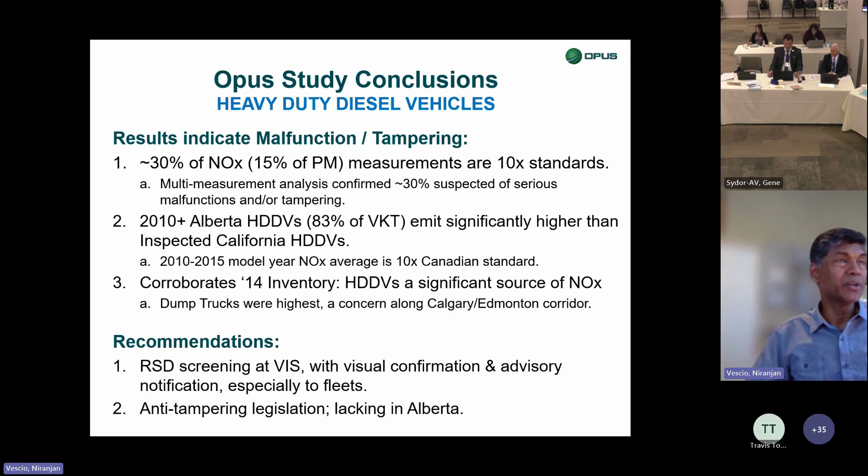So with that, we'll end and give you a chance to ask more questions.